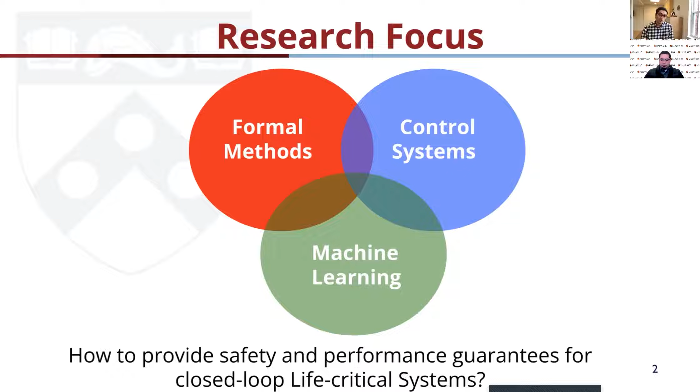And the research always involves some type of control systems where we have this sense, plan, actuate loop as part of it. And under the hood, almost all our tools have some kind of learning component. It's not necessarily applied machine learning, but it is machine learning, as you will see, in terms of exploring certain solution pathways. And we apply this research in the areas of implantable medical devices for cardiac systems. So these are like implantable pacemakers, defibrillators, or surgical guidance systems.

Don't worry, I won't talk about any of that bloody stuff, but those are also autonomous systems that are implanted in your body. They are deciding whether to shock your body or not. And we want to make sure that even if everybody's body is different and the interactions with these devices are different, these medical devices always do the right thing. We also work a lot on energy systems, but today, obviously, we're going to talk about autonomous vehicles.

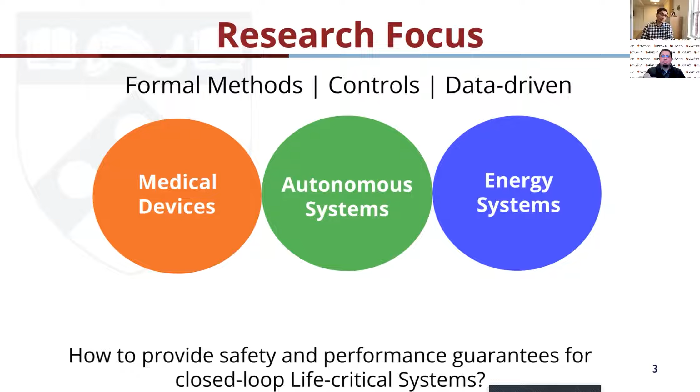But no matter what topic we work on, the question we're always asking is, how do we provide safety and performance guarantees for closed loop life critical systems? And this is a very challenging topic with autonomous vehicles. So even though we spent over 10 years working on autonomous vehicles like passenger vehicles, the problem was too wide. If you were able to test and validate the system in certain scenarios, what about other scenarios? What about other environmental conditions? And so that brought us to this world of autonomous racing, where the scope of the problem is very focused.

And so in today's talk, I'm going to focus on 4 specific themes, where we asked 4 specific questions, and I'll describe to you the research regarding each of these themes. So when you are driving on the road, especially around the DC area, it's very difficult to know, are the people around you cooperative, or are they very adversarial? Are they going to let you pass or let you overtake or not? So in autonomous racing, this gets pushed to the extreme.

And here, you have to basically know how to dynamically balance safety and assertiveness. So we asked this question: in this racing context, how do we generate the most competitive agents who can dynamically balance safety and assertiveness? You crash, you're out of the race. You're too conservative, you're not going to win, and that's not even a career choice, you're out of the race, right? No point racing then. You're racing to win, but you have to continuously balance safety and assertiveness.

The next question we ask is that, well, we are racing, so we've got to have the best vehicle. So how do we build the most efficient autonomous car? And this is going from the mechanical design of the system to the perception, planning, control, the entire stack for a given racetrack. And then how do you actually improve on that design and have reusable core autonomy components that you can then transfer to different kinds of racetracks or different environments? And so we look at what kind of optimization happens under the hood there.

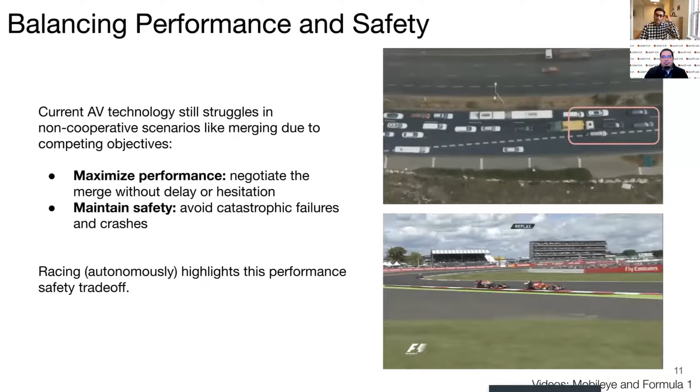So here there are two high-speed racing cars, I think it's Alonso and Vettel. You can see these very expensive cars going at over 200 kilometers per hour, coming very close to each other. They don't know exactly how the other driver is going to go, and they basically have to win the race. So they have a very clear criteria, both for safety and for performance, whereas in real-world driving we don't have that explicit criteria for performance. That's why we started focusing on racing.

So there are three big differences, right? Crashing in Formula racing is very expensive and dangerous because you're driving at over 200 kilometers per hour. The sensors that we use, LiDARs, cameras, IMUs, those sensor observations don't capture the intention of the opponent driver, and we can't capture the driver's behavior explicitly. So we have to have some way to capture this more abstract driving policy of the other driver.

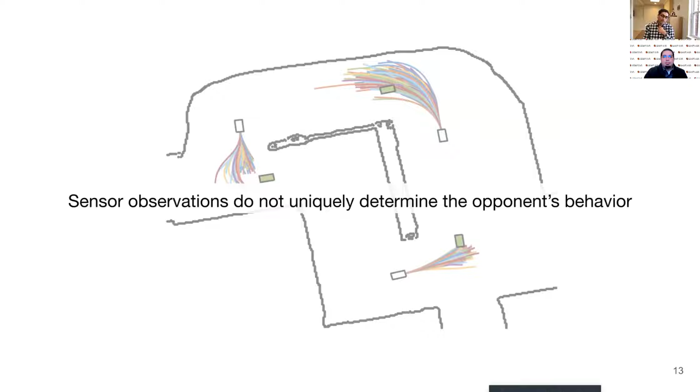And you could say, okay, why don't we learn from previous races? We just watch many races of Vettel and Alonso, and then we figure that out. But the thing is that the cars are secret, and the race strategies for the next race are all secret. So we actually are in a very small data regime over here.

And so as we start to look at this problem, we can start with a classic reinforcement learning formulation where we have to minimize the expected cost of a set of actions over some time, right? But the problem here is that there's a lot of uncertainty in how the other agents behave. And so therefore we have to convert this into a minimax problem

over this uncertainty set P, where we basically have state transition probabilities P_SA, and essentially, we are trying to build models that can parameterize this uncertainty space P in terms of a POMDP. And so if we did not have this uncertainty, then we do not need that max over there, right?

So essentially now, given this kind of formulation, which is quite general at this point, we want to learn a useful parameterization for P, and how do we really think other drivers are. Thinking of them as their continuous movement of a steering angle or a next throttle position is very difficult to capture in a model, where we want to think of their behavior more abstractly and more descriptively in terms of their driving policy, as how they would deal with any scenario, right?

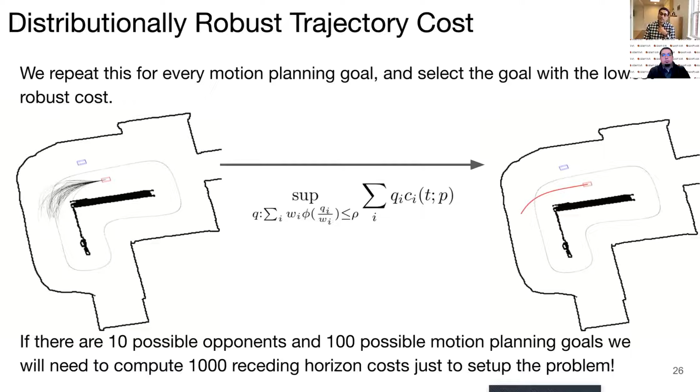So for example, if we would have 100 possible motion planning goals and 10 possible opponents, we have to compute 1,000 receding horizon cost computations just to set up the problem. And here we can see that as we now start to update our belief vector, initially we have a balance of selecting from many offline models. As we start to drive and observe the vehicle in just a few snapshots, we start to get a weighted observation in our belief space.

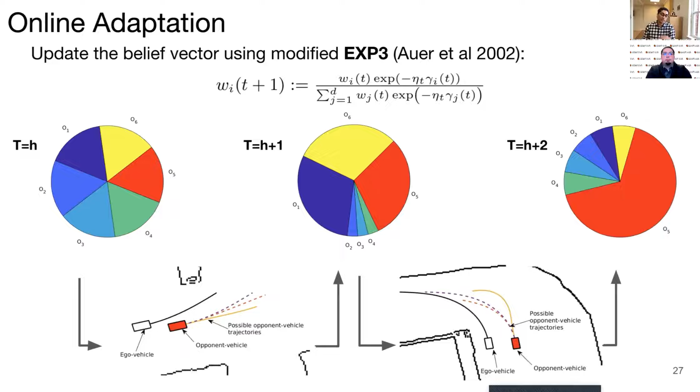And so essentially, we modify the adversarial bandit setting and the classic EXP3 algorithm to consider multiple plays, which we can evaluate in parallel. And this gives us more confidence and a smaller uncertainty ball for how our opponent is going to behave in the future, right?

So the first simple hypothesis that we had was: by increasing the robustness for very uncertain behaviors of opponents, with a larger robustness ball, are we safer? If we look at the time to collision, or TTC, values, when we are getting very close at very fast speeds to an opponent and almost going to crash into them, in this less than 5-second regime, as we increase our robustness ball size, our TTC value goes down. That means we're getting safer, and less often in this very unsafe regime. So that does conclude the first hypothesis: with increased robustness, you get increased safety.

But what we really want to figure out is, by actively identifying the opponent's strategy as we race them through the course of the game, can we regain some performance? Because by being more conservative, our win rate with a larger robustness drops from 60% to 50%, and we don't want to sacrifice that win rate. So the question is, can we regain the performance of aggressive strategies without the downside of compromised safety?

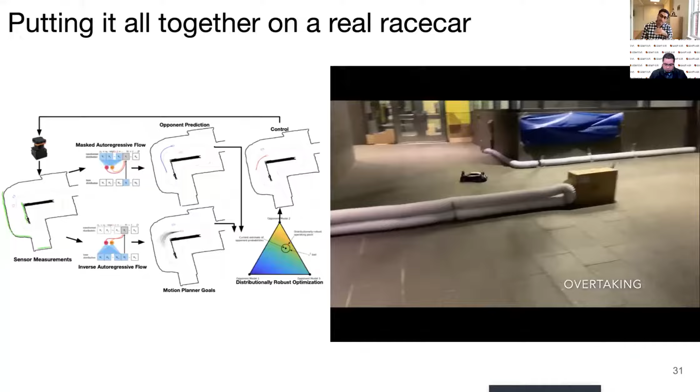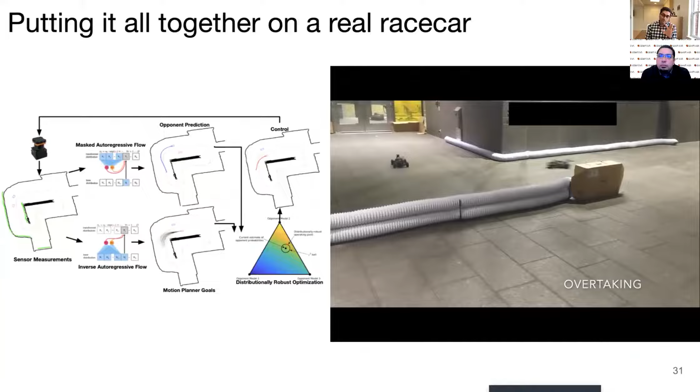So this maintains this high win rate throughout. And with all the work we do, no matter what the theory is, we want to see this theory tested out. And so we use our F1/10th racing cars to test this out, implemented this strategy, and could see that this strategy works in real time on a Jetson computer on board. So the computation is done only on board the vehicle. There's no external laptop running any computation online.

But as we go through this, the research questions that we still have, and that we're open to collaboration on, is how do we approach the same problem considering out-of-distribution agents that are not part of our offline population generation set? Or is there a way to address this problem without using prototype opponents in that manner?

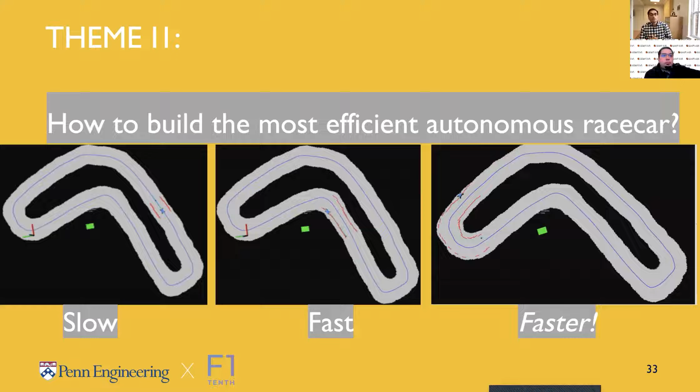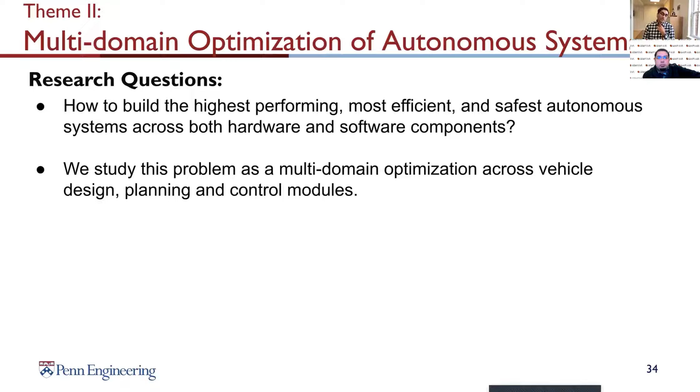So this brings us now to the next theme, which is how do we build the most efficient autonomous race cars. The main question over here is that we want to now optimize across hardware, software, mechanical, perception, planning, control, and how do we do this multi-domain optimization in a manner that's very efficient. This work is captured in the paper we called TunerCar in ICRA 2020. TunerCar is basically a car that gets auto-tuned for whichever race it's going to.

Essentially the whole issue started with, we have many autonomous racing competitions as part of our F1/10 challenges every year, and I'll talk briefly about that if we have time at the end. Every time the teams come there, they spend hours and hours just manually tuning the car. So we were like, how can we build a system that can automatically tune the car?

So as it is driving, if we had different knobs for the vehicle mass, length, width, center of gravity, cornering stiffness, path planner, and controllers, we automatically tweak them so that they initially start with very conservative drives, say a lap time of 25 seconds. Then we tweak these parameters so that it becomes faster and faster till you get the fastest vehicle that's also able to do some drifting as it goes. So it's operating at its limits now.

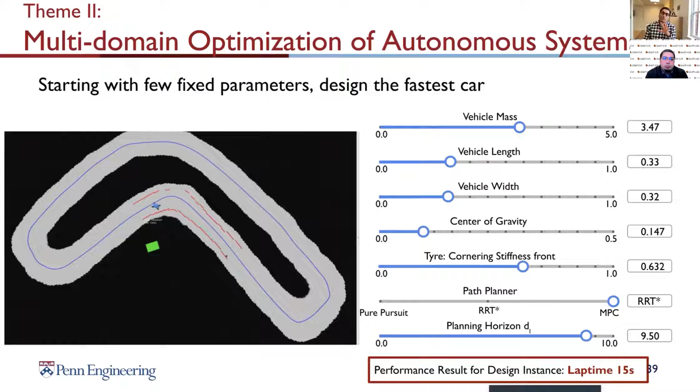So the question really is that cars are going to change, the environment is going to change, but our vehicle planning and control stack is the same, and it has to be automatically tuned. This whole work was motivated by the desire to create this safe and reusable core autonomy in the center over here, agnostic of the environment or the vehicles.

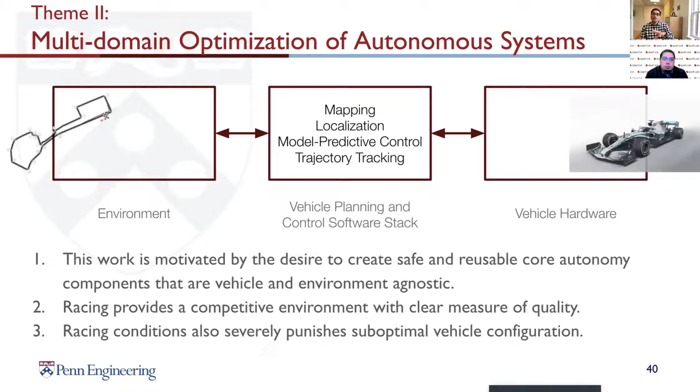Racing obviously provides this competitive environment where the clear measure is, do you win the race? What is your minimum lap time? Any suboptimal configuration is severely punished in the race. So as we have different designs, we want to optimize this vehicle for this race using this core autonomy stack, and then come to our physical vehicles for whichever race we are racing in next.

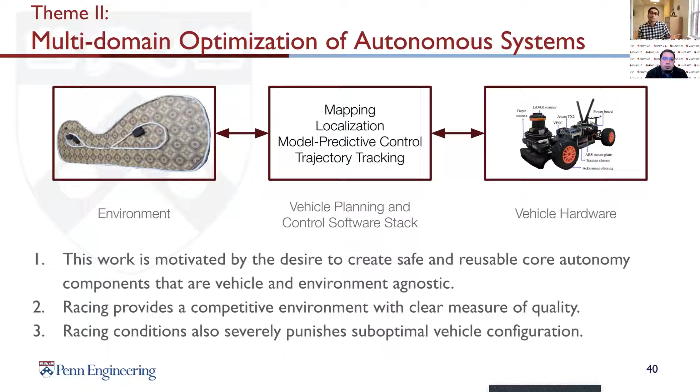The mathematical form of this is to minimize this objective function over the search space of over 500 different parameters from mechanical to planning to control. We map that from n dimensions to a real number that says, okay, is this the most performant vehicle? The way we do this is by using gradient-free optimizations, because our problem is non-convex and non-differentiable. So we use population-based and evolutionary algorithms to search through this very large parametric space.

This then generates a set of candidate system instances which we can evaluate in our simulation-based software. As we evaluate these runs, we can see which ones crash and which ones perform well, and this progresses till we validate each of these within our simulation environment, but also in the physical environment itself.

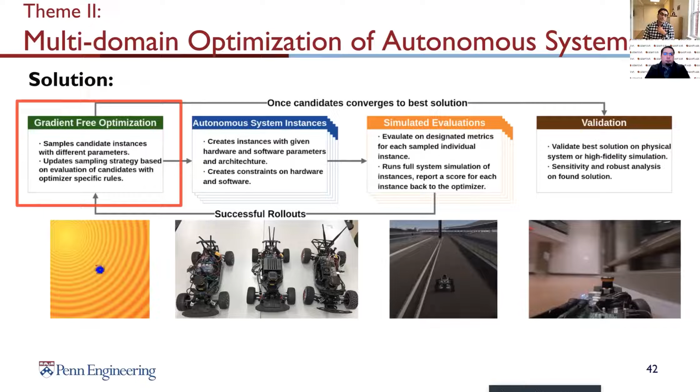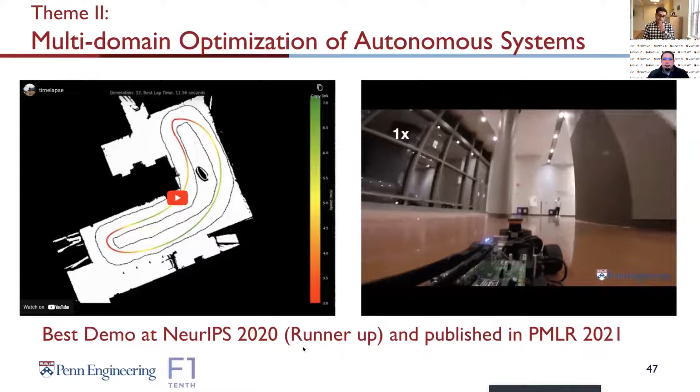Obviously, this is very sensitive to the ground, and we see that even with our results when we actually race the vehicle and we implement this over here, right? So that's Billy, my student, and this car is basically racing around this virtual line that it has been optimized for, this race line over here. And we want to see what the sim to real gap is. And so this was demoed at NeurIPS and published in PMLR 2021.

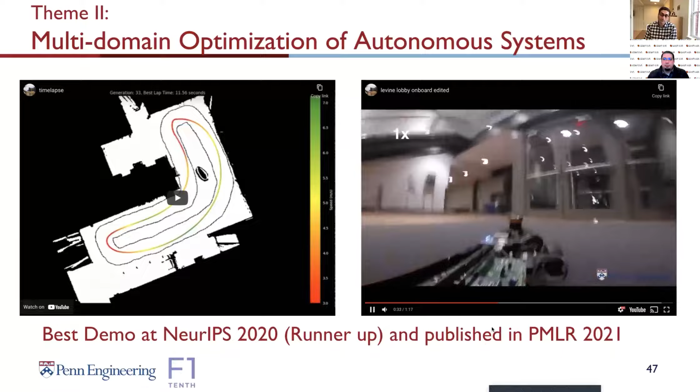And there are differences because the car is on a very slippery surface over here. It hits this gutter at this turn and then gets onto a carpet. So there's a lot of changes in the friction, but that's what these kinds of experiments give us feedback on, as to how sensitive our results are overall, right?

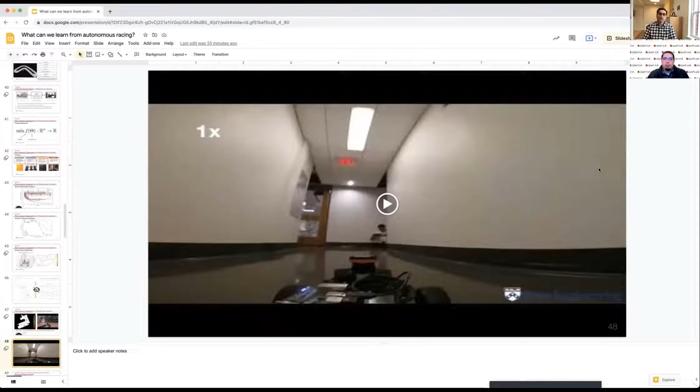Yeah, and then we ran other experiments in corridors with our F1TENTH car, and you can see that too. Yeah, so essentially we are interested in learning these dynamical models as the physical system, the environment, and the sensors change, go to different tracks. But now our current research is focused on how do we explore this performance tuning for multi-agent scenarios when you're racing with more than one opponent in place, right? And then investigating the sim to real gap is always an ongoing effort.

So coming to theme 3 now, as I mentioned, in this Indy autonomous racing, just in the simulation-based head-to-head race, 12 out of 16 opponents basically crashed into each other. And you might say, oh, that's because it could be problems with perception. In the simulation-based space, they were given ground truth-based perception.

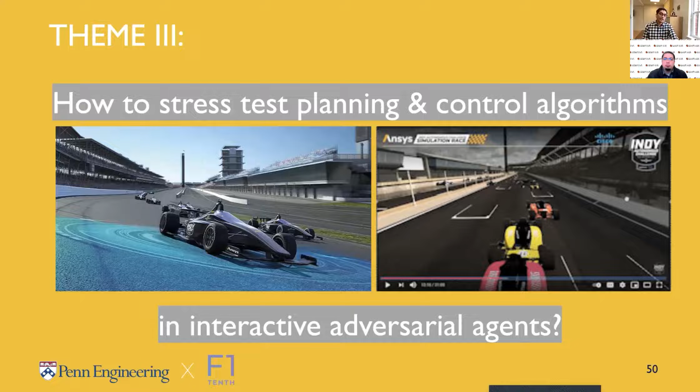So there was not a perception issue. It was mostly to do with planning and control. And so our challenge now was, how do we explore different ways for stressing this out? How can we evaluate path planners and controllers for autonomous vehicles regarding their performance? What are good performance metrics?

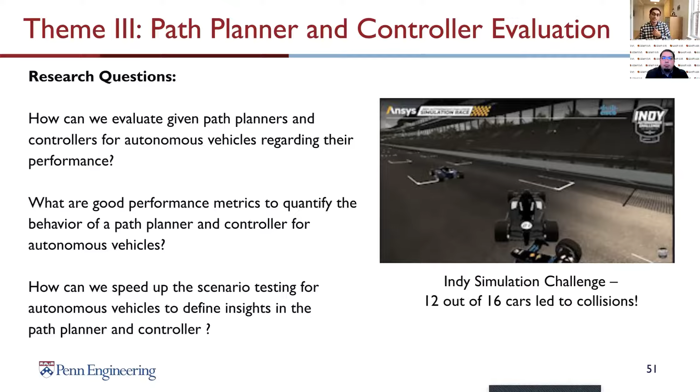Are they just following the line? Are they not crashing? Are they the number of overtakes a vehicle does? What are these metrics? Essentially we wanted to speed up this search for when the vehicle crashes, why it crashes, and under what conditions it's crashing, so that we can explore and make our planner and controller more robust, right? And we are also interested in this kind of coupling between planners and controllers.

So which ones work well together? To do this, we basically had to develop a simulation-based environment that was fast and deterministic, that would capture all the vehicle dynamics in a two-track manner, richer than bicycle vehicle models. And then we had to come up with a good search strategy, right? And the question is, what are you searching for?

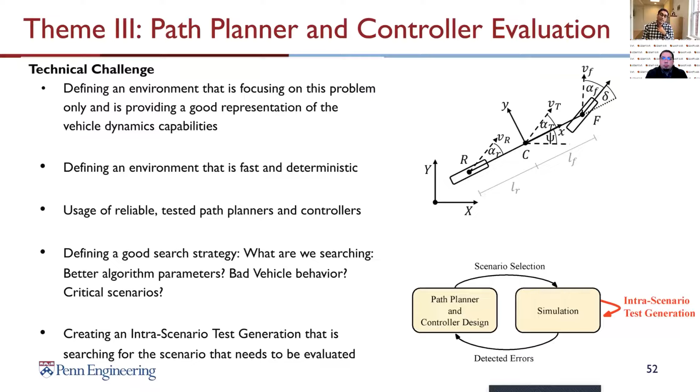A better algorithm for parametric search for your planner and controller, or searching the submitted agents that come into our races? Is there bad vehicle behavior? Or which are the critical scenarios for a particular racetrack? So essentially, we focused on creating this intra-scenario test generation between two vehicles racing head-to-head, so that we could search for when they crash, and essentially we are searching for when these tests fail.

As we are progressing and testing out these head-to-head vehicles racing, we are perturbing the adversarial agent at every time step to test under which perturbation it will cause our ego vehicle to crash into it, given a fixed racing strategy and a planner and a controller. And so we are interested both in maximizing the number of failing tests and in exploring the variety of failures, right?

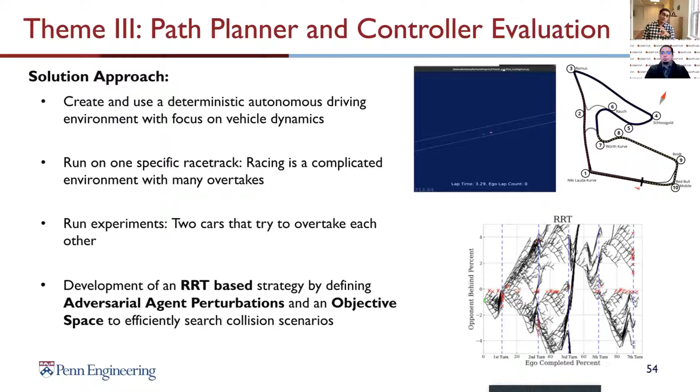So we created this deterministic autonomous F1TENTH gym environment, which interfaces with OpenAI Gym to allow for very scalable testing along different F1TENTH tracks. Like this is the Austrian track over here, and then we ran these with an RRT-based search strategy for these two vehicles driving head to head and perturbing the adversarial agent. And the objective space was efficiently searching for these collision-based scenarios.

Once we captured all these crashes, we could map them onto the track. Say in this track, there's a start over here, after the first turn there is a cluster, then we found many clusters of crashes along the straight. And you say, well, why are there crashes along the straight? You'd expect crashes more along turns, especially around hairpins and chicanes. So this allows us to go and analyze why crashes are happening over here. And we also have a lot of crashes as we progress through the track.

In order to do this, we could compare many different path planners like the disparity extender planner, the Frenet planner, graph planners, lane switchers with pure pursuit, so that when it sees an obstacle, it just switches to a predetermined pure pursuit path along the next virtual lane, and obstacle avoidance with gap follower planners. So different planners were taken into consideration to evaluate these crashes and clusters of crashes.

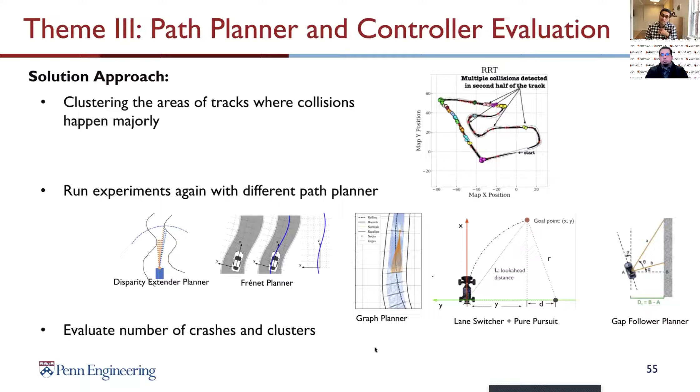Here's an example of this vehicle racing head to head, this purple vehicle trying to overtake the other agent, and when it has a successful overtake, it progresses more to the right over here. Right now it's looking at crashes along this curve. The further it goes along this curve on the left side, it's progressing, but whenever it hits a crash, you see an X over here.

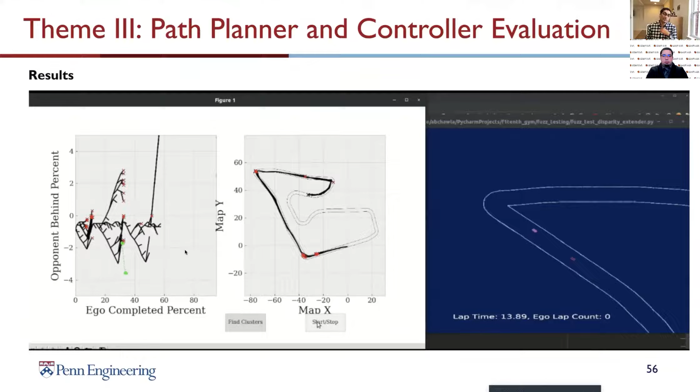So essentially we are perturbing and redoing the same turn, but with different initializations, searching for under what perturbation of the adversarial agent this ego agent is going to crash. And then we can analyze why that crash is happening. Now obviously we've done that for one track, and we could analyze the crashes along all these different sections of the tracks to get much more insight into how the path planners' decisions in terms of overtaking affect its crash rate.

And so next we would want to get more insight into the coupling between the controller and the path planner.

We have 5 different path planners here, 4 different controllers. We still have to analyze how these different controllers, in terms of LQR and MPC, affect the behavior of the system. And then integrate more metrics in evaluating the vehicle performance in terms of number of overtakes. And then combine this with the tuner car approach that designs the vehicle and also improves on the planner and controller parameters to come up with a much more competent agent.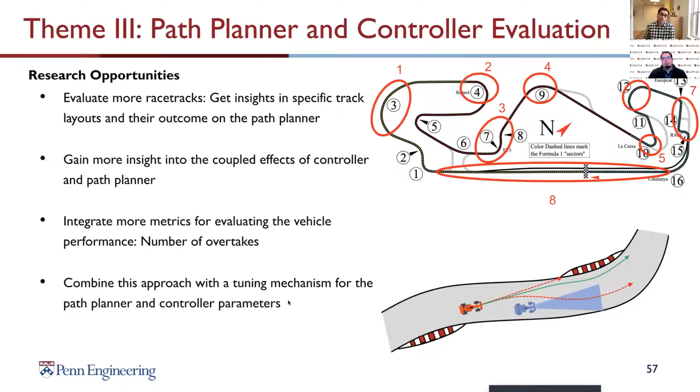So another project that we have, and this is the last theme over here, is one level up. So I'm going to take a step back and say, okay, so far we are trying to design these race cars, make them safer, make them more competent, balance safety and performance. But now we are part of a large DARPA project on AI co-designers for model-based design systems. They're saying, okay, let's mine previous designs to autocomplete new designs with these new requirements.

And so say you graduate and join a company to design, say, drones. Like one of my students joined Skydio. And so Skydio has a couple of models that they have designed before. I think it was a company that got funded more than 500 million. And in the 3 months between him getting an offer and joining, the company doubled to like 220 people or something like that. They are a company on the rise. They have a couple of candidate designs, a couple of products out there, and they want to design new products.

So if you're an engineer starting in a company like that, you'll say, okay, how do I design a drone? Let me talk to my colleagues. Let me see what previous designs they have, what kind of CAD models, what kind of drawings, what kind of specification and software stacks they have, and then use those as components to create a new design. And so here the question is, is it possible to create generative models that can synthesize these designs, but being informed by previous designs?

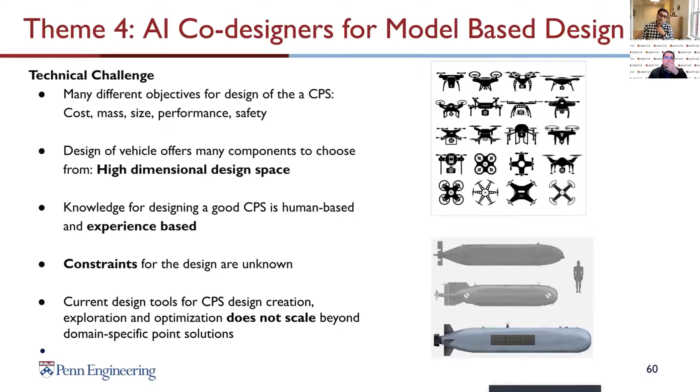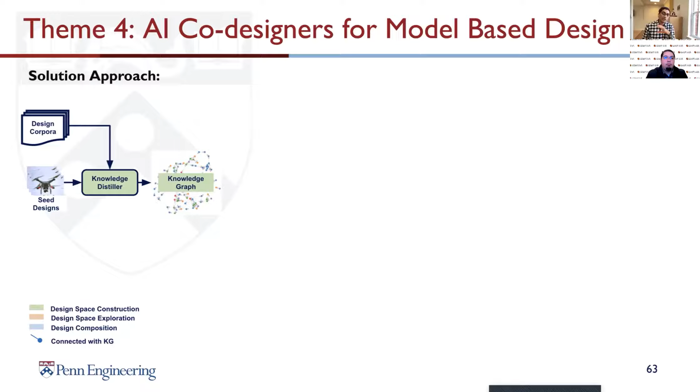So essentially what we do now is we mine previous designs and treat them as design corpora or seed designs, and we capture them in a knowledge graph. So the batteries, the chassis, the motor drive, the motors, the fins, and so on are all captured in relation to each other. They have constraints related to them that are also captured in the knowledge graph, and the performance of these candidate designs is captured there. So what we have to do then is to explore this constrained design space to generate new designs.

This project is in the early stages, in the first year of a 4-year pipeline, where we have done the parametric exploration of the design space, and now we are moving to the architectural exploration to synthesize new designs. As we come up with candidate new designs, we can then iterate through the system and improve on these designs.

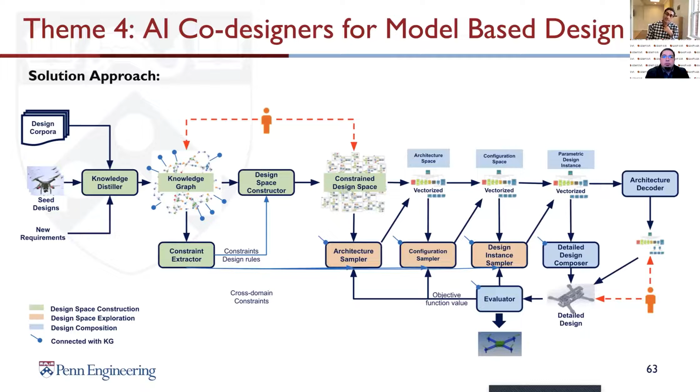And this is basically a co-designer. That means, as we come up with candidate designs, or want certain constraints specified, we have the human come in and dictate which are good designs and which should be eliminated from the search space. So there has to be an interface to the human side too.

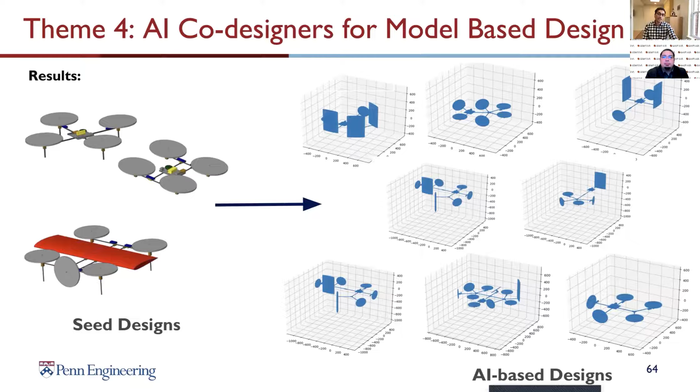So there was a hackathon about 2 months ago where we were given 3 manually constructed hex rotors and H rotors, which have fins and rotors as seed designs. And we had to come up with new designs that were, I'll just call it AI based. I don't like the word AI based, but it's an AI based design. So it was generated designs that use a graph VAE approach to mine the previous designs. But they have to pass different benchmarks, right?

So this first benchmark, which just shows this line, was an endurance benchmark to see how far this drone can fly. And we were competing with other teams from MIT and Stanford and other universities, and so essentially it's an endurance test to see whether it can go over 25 kilometers. Then there was a control trajectory design benchmark to see whether it can actually go in a circle, and it was penalized if it went out of the circle, right?

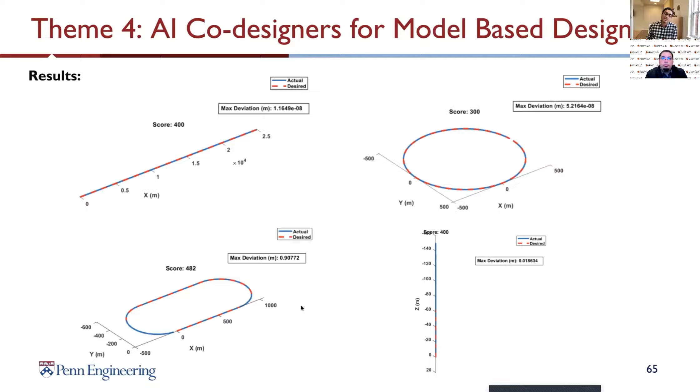And then there were tests like, could it hover to a certain height, and how can it go higher than that height for a certain duration of time? So that's a different kind of endurance. And then putting it all together, they had to go along a track, and you wanted to see how fast it could go along this track, kind of like our racing thing, but with a drone. So these benchmarks were tests that these AI-based designs had to meet, right?

So for each benchmark, obviously the AI-based system came up with different results. For, say, endurance, it basically put on a hex rotor so that it could move through, but it required more batteries for that, right? So there's no human interplay in these designs.

The interesting design was design number 2, where it had to go around a circle. Since it's going around a circle in only one direction, it found that it had to put less effort on the inside rotor. And so basically this inside rotor is smaller than the other 3. So it actually optimized just for going around the circle in one direction. If we made the benchmark go around the circle in the other direction, it would be different; it's not invariant, but that's an interesting choice.

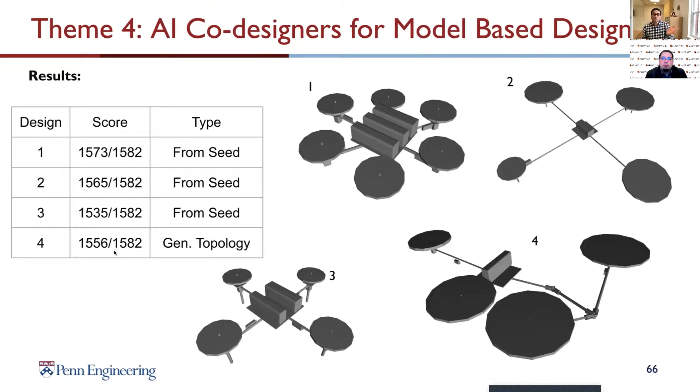This design 4, we didn't even believe it could fly, but it actually flew and gave us a very good score. And the scores were basically to see how close we could get to the maximum possible score for these benchmarks, right? And as we go forward, it's about how do we capture and extract these relationships between components from prior designs and build this entire automated pipeline, right?

So I have about 5 minutes left. I just want to wrap up here.

So autonomous racing is all about racing at the edge of performance, where you have to detect the vehicle's limits, make decisions at a very high speed, balance safety, stress test the vehicle, and also come up with optimized vehicle designs for the particular track and the particular competition that you're working on.

But most of all, the important thing is that it explicitly defines the criteria for safety and for performance, unlike civilian driving. And unlike civilian driving, all our opponents are adversarial, right? So we are working in the worst possible conditions to make the safest possible vehicle.

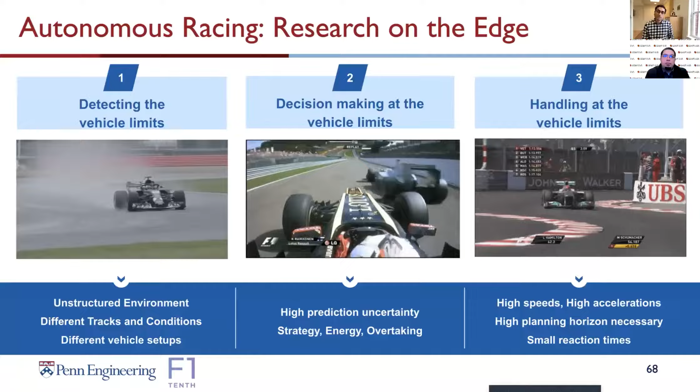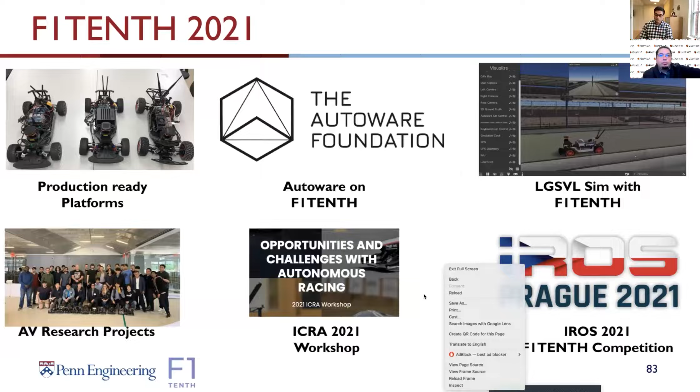So in order to do this, we have many activities with our F1TENTH systems where we organize workshops in autonomous racing, and we have competitions. We had a competition at IROS. We'll have one at ICRA in Philadelphia in May. So please participate. That information will be on the F1TENTH webpage. And last but not least, how can you get involved? I think these slides are muted out, but I'll just cover a few.

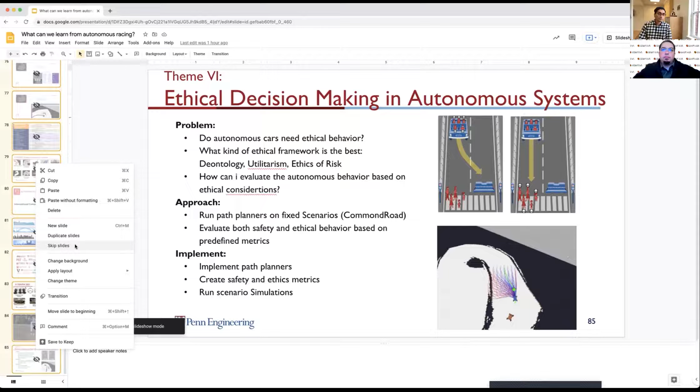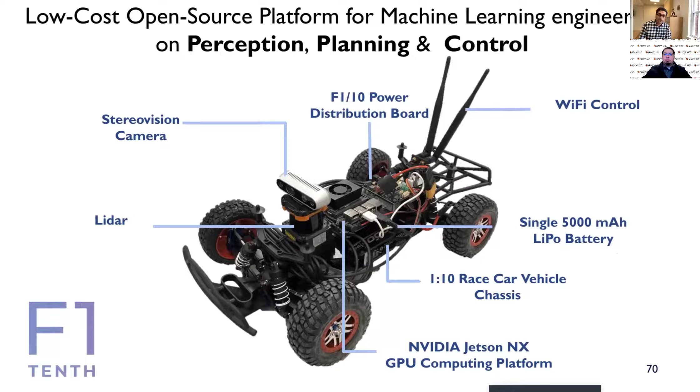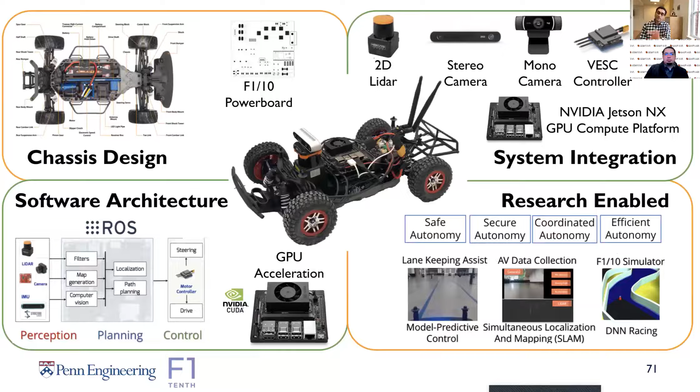So we designed these 1/10 scale autonomous racing cars that have GPUs on board, lidars, cameras, and we can send a car to UMD for free to get started. Many universities are teaching this as a course, going from mechanical to putting all the sensors together. Now these cars are ready, so you don't have to worry about putting them together. You can already do your research or race in a competition with these.

There is the F1TENTH gym and the LG SVL simulator, which simulates the same full software stack in 2D and 3D.

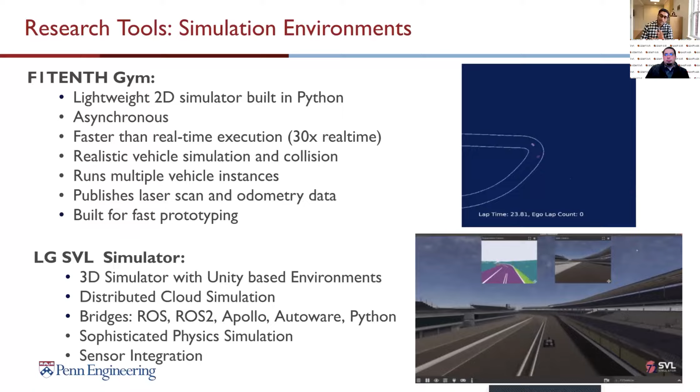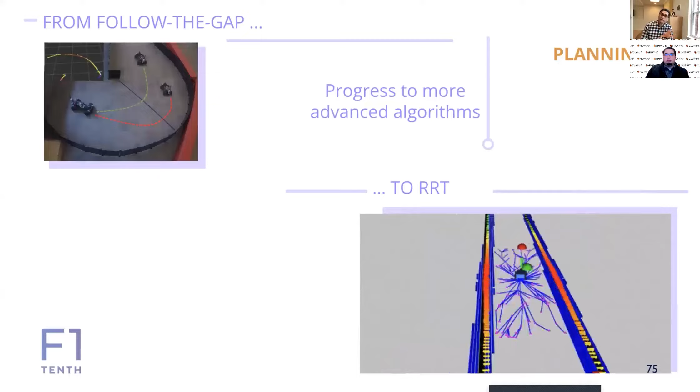And so we've designed a course that we teach every semester on autonomous racing that takes you from the basics of ROS all the way to perception, planning, control, learning, vision. And there are no exams in this course. There are just competitive races that are part of it. There are obviously 8 very rigorous labs, but the students have a lot of fun. And then the students do a lot of research projects at the end of the semester in a variety of areas that they're interested in using these vehicles and the simulation environments.

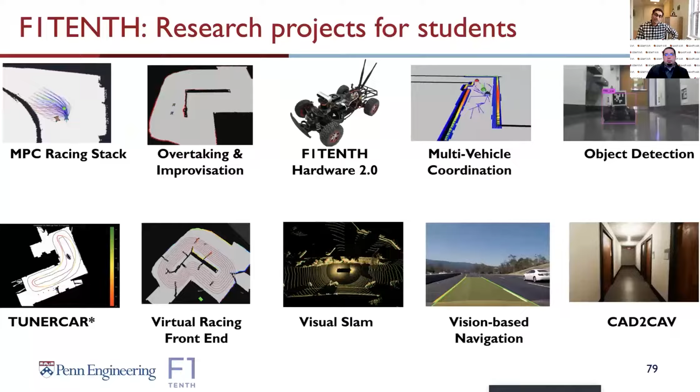There are many competitions, and over the years, we've had many competitions. In 2022, we'll have 3 competitions: in ICRA in May, in the CPS week, also in May, and then in IROS later in the year. And these are in-person competitions, of course, modulo how Corona treats us, but it's going to be in Philadelphia in May. So it's very easy for UMD students to come and compete. There are many, many universities, including folks in UMD, that have supported this and are participating in F1TENTH. And this is the website.